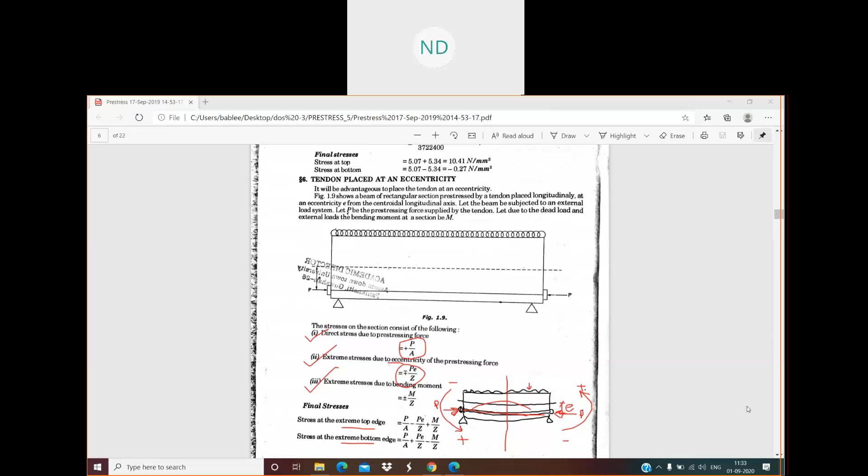This one - did we do this? Tendon placed at eccentricity. Did we do this tendon placed at eccentricity? Yes ma'am, we have done this one. Okay, okay.

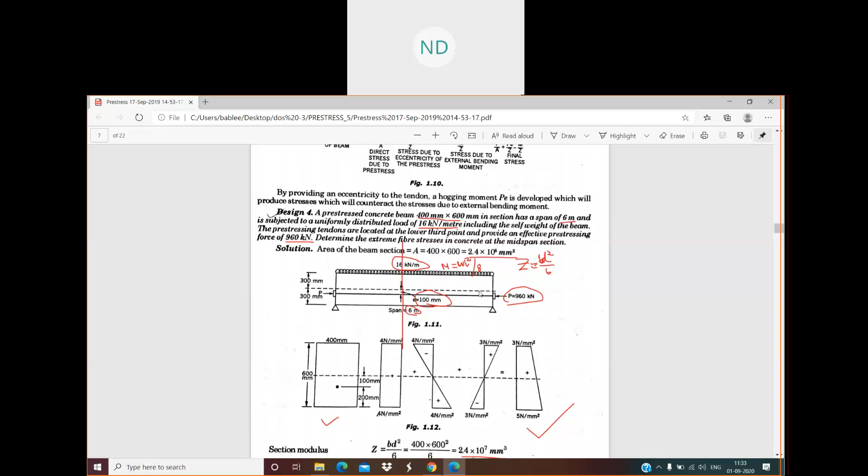Have we solved this problem on eccentricity? When your tendon is here at an eccentricity, did we solve it? Ma'am, we saw last class. This one - this one solved. Or I did in the other section. I think we have done this problem. Yes ma'am.

Did we do this - a pre-stressed concrete beam method? The effective stress in the steel is 800. I think we have not done this. Maybe not done, not done. No? Okay, not done ma'am, okay.

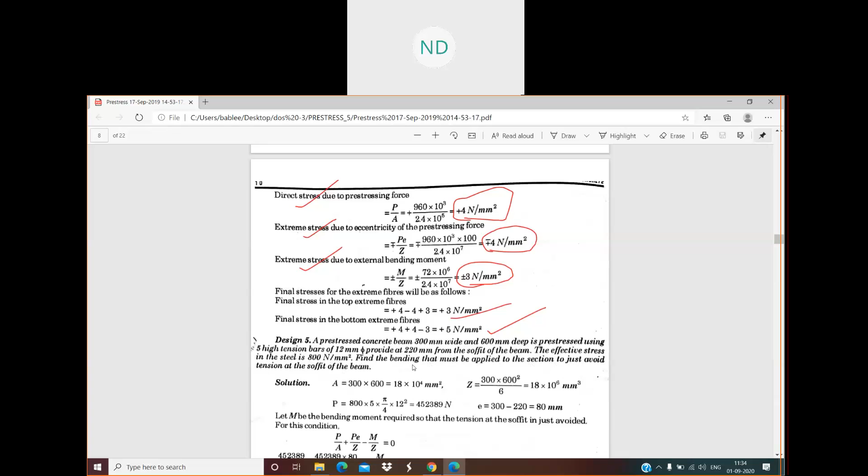Okay, see now, this question.

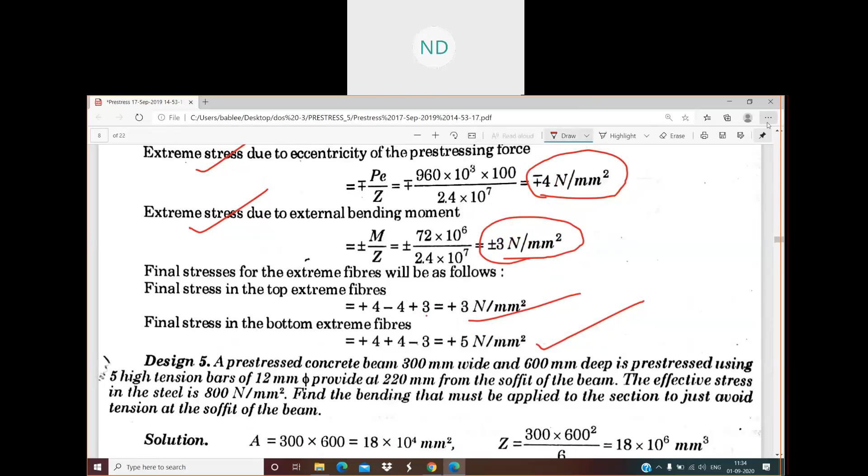This question, what is mentioned?

A pre-stressed concrete beam 300 mm wide and 600 mm deep is pre-stressed using 5 high tension bars of diameter 12 mm, provided at 220 mm from the soffit of the beam. The effective stress in the steel is 800 Newton per mm square.

The effective stress is given to us, but the pre-stressing force is not provided. We are asked to find the bending moment that must be applied to the section to just avoid tension at the soffit of the beam. That means we have to find the bending moment.

We know the tension is at the bottom, and soffit means from the bottom edge.

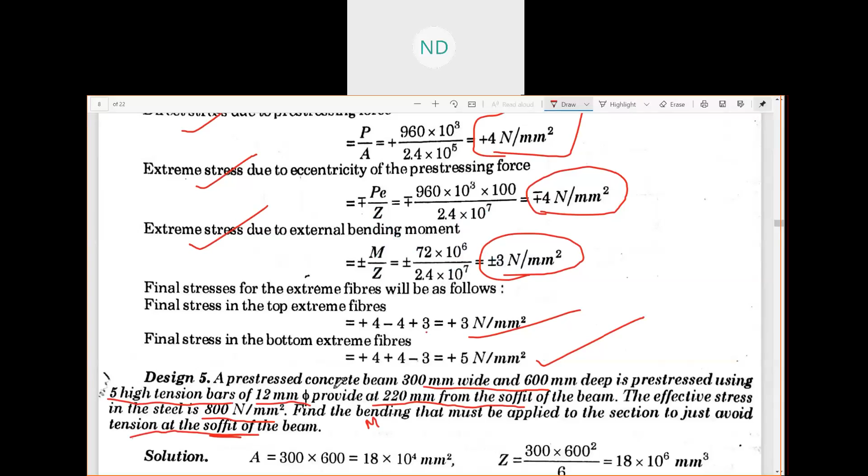Let me show you here. This is your beam given to you, and the section is given to be 300 and this depth is 600.

Then we have 5 number of tension bars used here. This is your beam with the center here, and the tendons or the high tension bars are placed here.

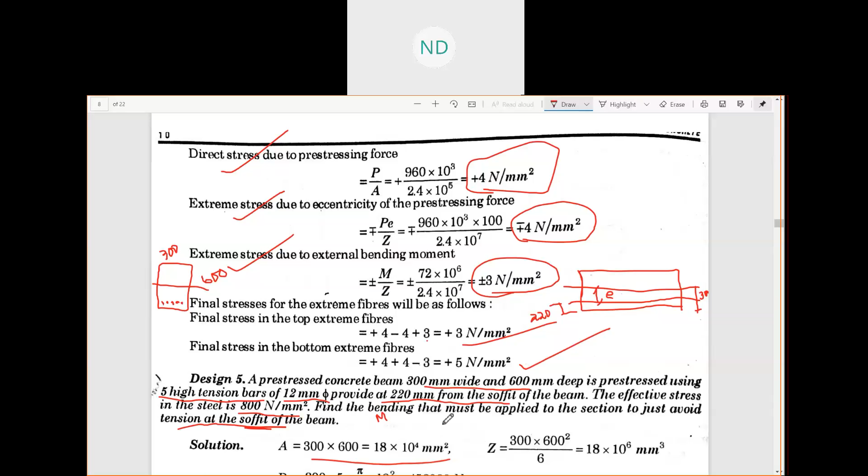Now you are given an effective stress of 800 Newton per mm square. Since you know the number of bars and the stress, you can find out the pre-stressing force. For area, you can find out from the section, and the section modulus, BD square by 6.

Then you can find the pre-stressing force to be 800, which is the effective stress, into number of bars 5, and the area of the bar is pi d square by 4, where diameter is 12 squared. So this is your pre-stressing force, because stress is force per unit area. So your pre-stressing force will be this effective stress into the area of the bars.

And how many number of bars are there? 5 number of bars. So you got your pre-stressing force from the effective stress and the number of bars and the diameter of the bars which is provided to you. And eccentricity also you have calculated: 300 minus 220 will give your eccentricity to be 80.

Now once you have these things, we have to calculate the bending moment. We know the stresses that are developed at the midsection - how much? P by A, that is the stress due to this pre-stressing force P, and the stress due to this bending moment M by Z.

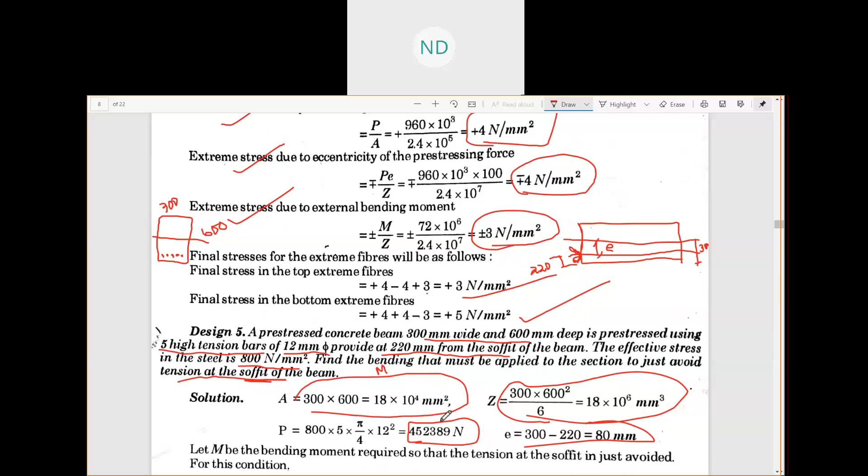Z we know, but now we can equate it and find this out. If we consider this, and also there was eccentricity, so at the soffit it was how much?

P by A plus minus M by Z, minus plus PE by Z. We had this total force, stresses which were on this particular beam. This one is the stress due to this pre-stressing force, stress due to the bending moment, due to this load. Then due to this eccentricity, there is another moment which is minus plus PE by Z. Due to this eccentricity, the moment will be in this way, that means negative at the top, and at the bottom we have compression.

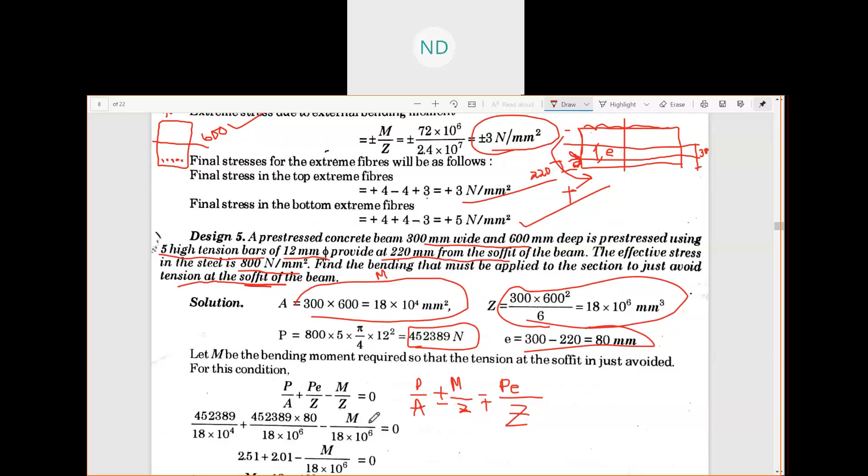But in this question we are asked to find the bending, just avoid the tension at the soffit of the beam, that means at the bottom portion. So at the bottom portion, we know our signs: P by A minus M by Z, plus PE by Z. Now once we get this equation, we put the values in it and we can easily calculate our bending moment, which is 81.36 kilonewton meter. So in this way you can calculate your bending moments when the effective stress etc. is given to you.

Today we'll be talking about the bending stress, the pre-stressed beam with the bent tendons. Let me bring it up. Now where is the bend tendon? Can you see my screen now?

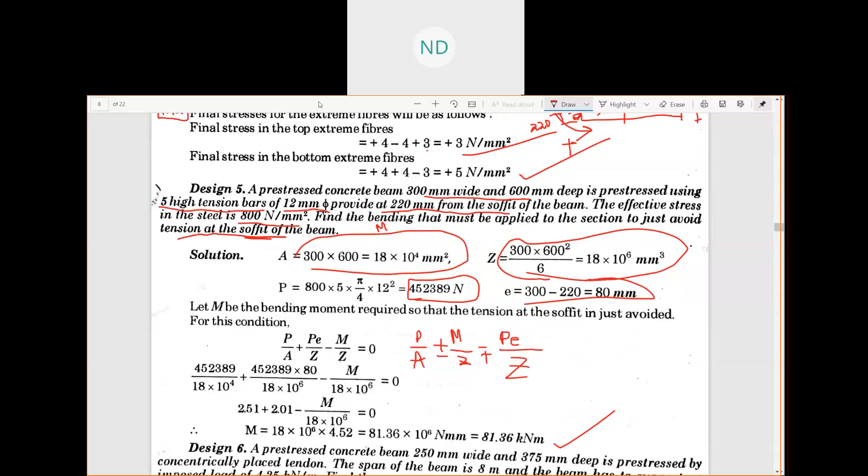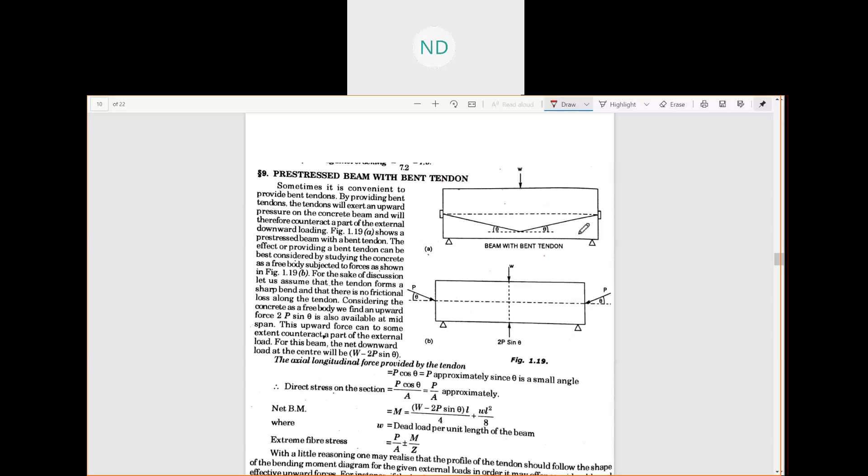Pre-stressed beam with bent tendons. Let me see this. These are your bend tendons. Now, sometimes what happens is that you will have bend tendons. Earlier we were doing simple concentric tendons, where either they were at the center or at an eccentricity. But in some cases you will also have bend tendons. These are your bend tendons here.

So now when you have a bent tendon, by providing it you are exerting an upward pressure. Because when you're doing pre-stressing in a bend tendon, you are going to pull your tendons, giving tension to them, and then when you release, these pre-stressing forces are going to act, and as a result of these two forces coming on your tendon, this forces are going to come. Due to these two forces, there are components - let's consider this is at an angle theta with the horizontal. There will be vertical and horizontal components on both sides: sine thetas and cos thetas.

We are providing this bent tendon so that due to this pull, when you are having a pre-stressing force, it gives an upward pressure which is going to counterbalance this external load, the point load here. Now this load W, the bend tendons will always produce pre-stressing upward stresses, upward thrust due to this bending. This bending is given by 2P sine theta, because there are two vertical components of force due to this pre-stressing force, each sine theta, so 2P sine theta here.

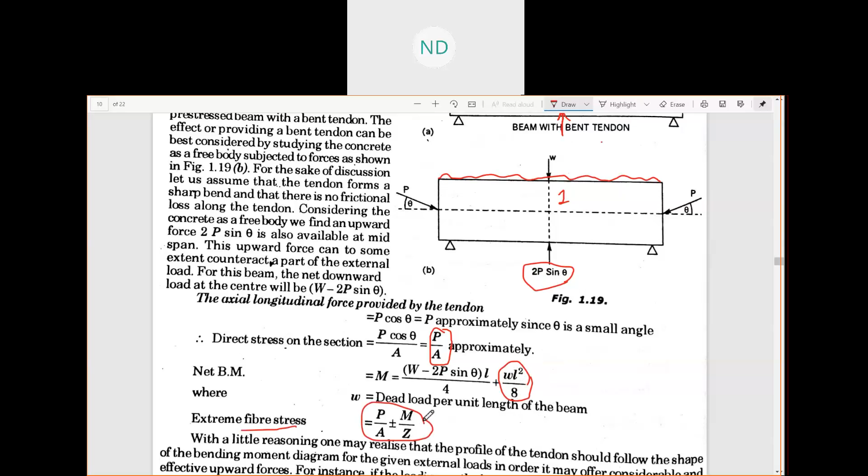Okay, so now if we go to a problem here, you see, this is your problem. Ma'am, once again, can you explain once again? Okay.

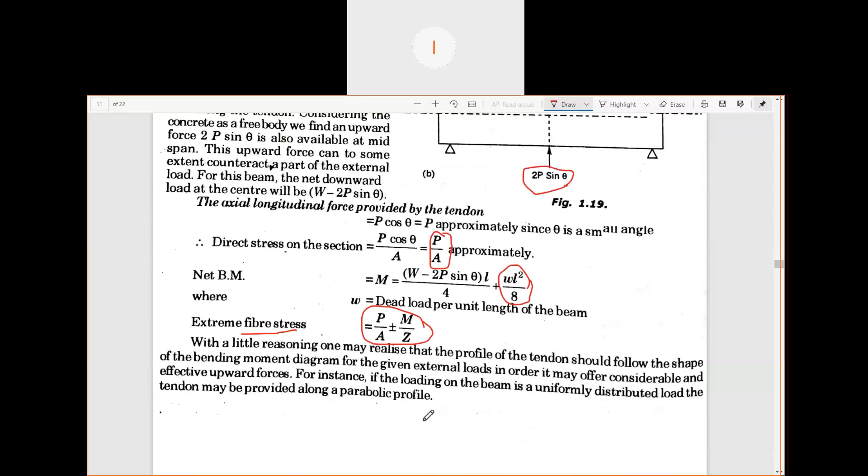See here, there is nothing in a bend. Then what happens actually? Why are we bending this tendon? Because so that there is a balancing of the load. So when we do the pre-stressing here, the bent tendons will provide more upward thrust.

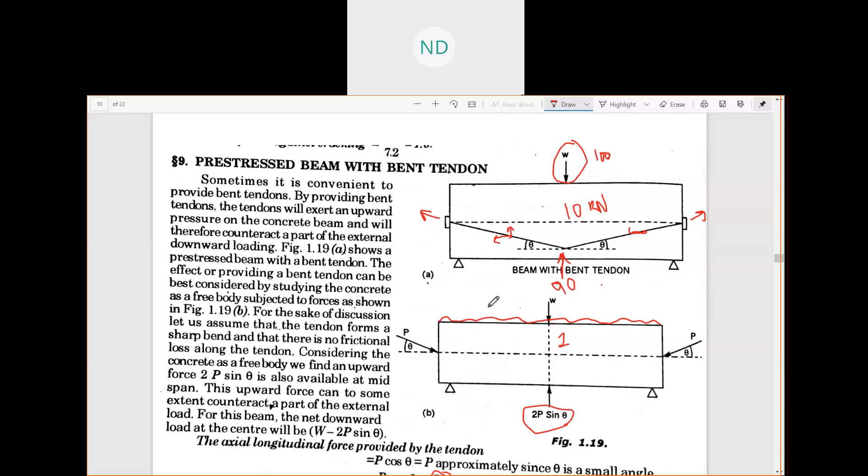So what happens is there is no change, only you have to calculate the stresses. These are your stress: direct stress you already know from your pre-stressing force, and due to the bending moment of the different loadings, your stress due to bending moment will be there. So that is M by Z, plus or minus, you know.

And what is your M? M is nothing but the moment due to the UDL, that is the dead load, and the moment due to the point load. And what was your point load? Already I told you, if it is 10 kilonewton and your upward is supposed 9 kilonewton, the leftover is 1 kilonewton, and that 1 kilonewton acts now on your beam as the point load.

So you have to consider that point load after counterbalancing, and then take this moment. So it is W minus 2P sin theta, because your upward load is 2P sin theta. You have to calculate your upward load, given by 2P sin theta. And your L you know, 4 you know. So these are your stresses.

Okay, fine. Done. Understood now? Next class we'll do a problem on this bent tendon. Okay, who was telling me to repeat?